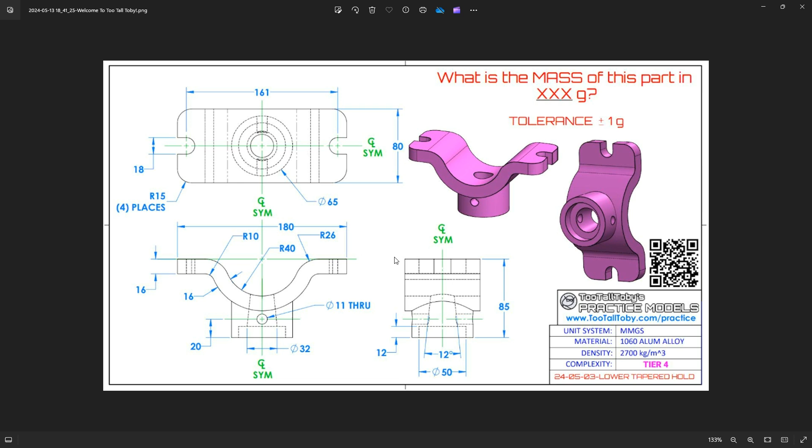Typically, I think most people would draw this bottom profile as a sketch and then offset it to extrude. I'm going to show you how to build this in IronCAD instead. We could build it the same way, but I'll show you some other ways using our catalog. So let's hop over to IronCAD.

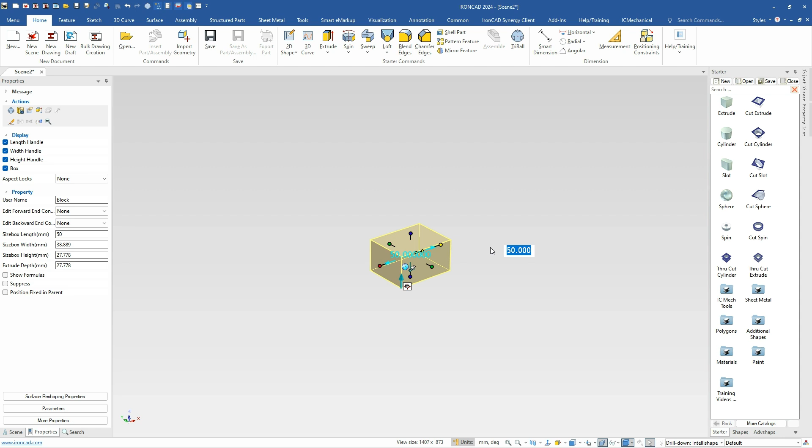I'll walk through building this model. I'm going to start with an extrude and put the overall dimensions on this. So we have our handle highlighted yellow showing which way it's going. We know the total length is 180, the width is 80, and our thickness is 16. So we'll set our base there.

Next, we have a bunch of catalogs - starter shapes, advanced shapes - and inside is a part of a cylinder, which I can drag and drop out here. I'll flip the direction and snap it down to the bottom, since that's where our center point is.

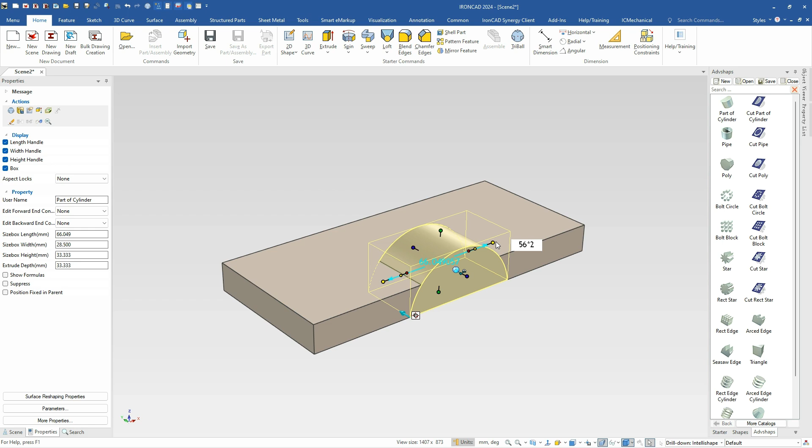Now we just need to set our diameter and radius. On the diameter side, we know this is the 40 plus 16 for the thickness, multiplied by 2, so it's 56 times 2 for the overall width. Then we do the same for the top, but this is just the radius value, so we can edit the size box to 56 for that diameter. That gives us the overall size for this shape.

So that gives us our starting shape here. Next, I'm going to add our blend, which has a 10 millimeter blend on this, or fillet, however you like to call it in other systems. We call it a blend in IronCAD, and we'll apply that there.

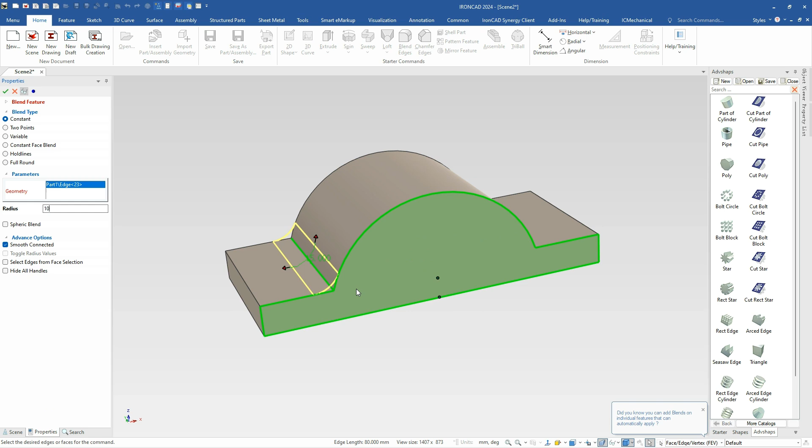Instead of doing this as an extrude by drawing arcs and extruding through, I built it this way so I can simply do a shell on this part. If I shell it at a thickness of 16, it won't mess with our shape - there's nothing to shell, it'll just shell out our center part. So we set the shell at 16, hit OK, and that gives us our value.

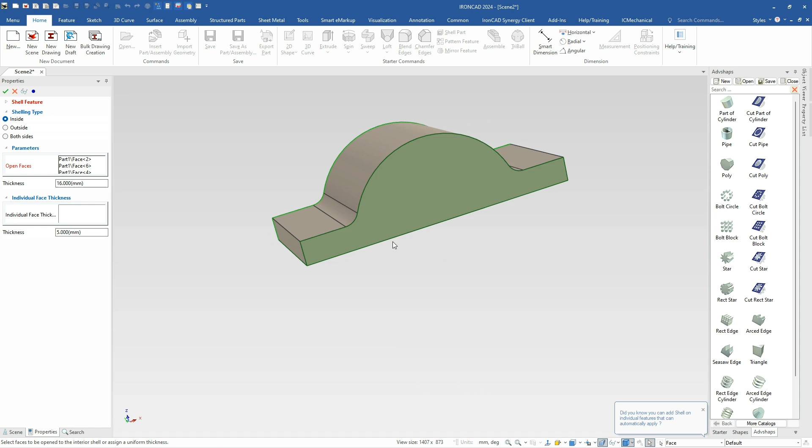If we want to verify this, we can look at this arc here. Our radius is 40, that's the thickness. So we did the math right - this is 10, and with the thickness it becomes 26, which matches what's called out on the drawing. Just a very interesting way to build that shape.

So again, we didn't have to go into the sketches to do that. Next, I'll go back into my starter catalog and drag and drop a cylinder out here.

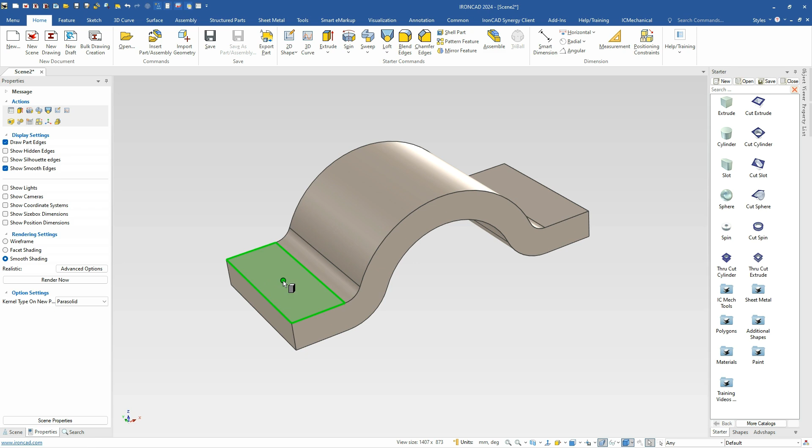I'll drop it on the center point so I have a reference that I'm in the middle of this part, and we know the distance from the bottom to give the overall height, which is 85, and it has a diameter for this shape of 65.

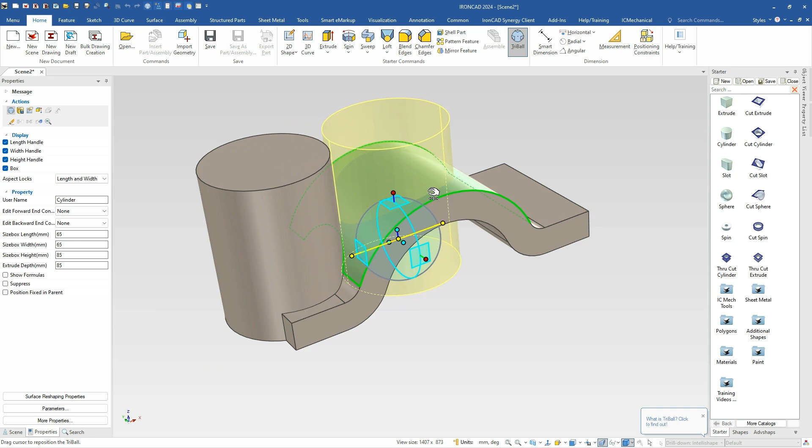Now we simply move this over to the center of our part. I'll lock an axis here, grab the center point, and snap it over. I can hit this quadrant point, or hold the shift key down and select that circular edge, and it will snap us right into the center. That gives us our location for our shape.

We don't have to use any datum planes or anything to do that - we just use our TriBall.

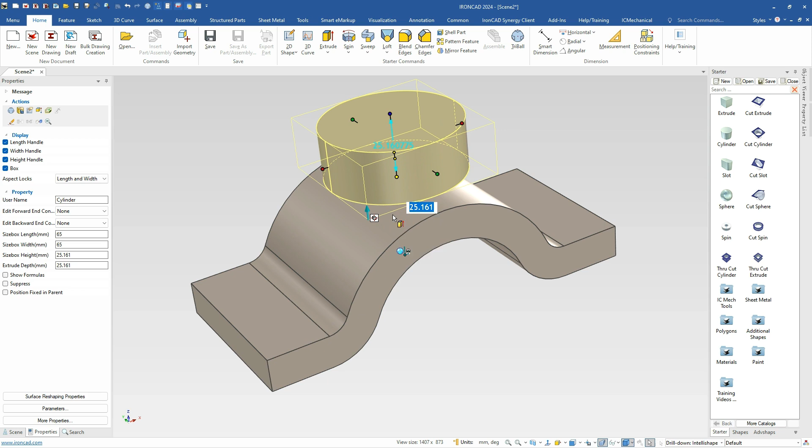Last, we want to make sure this stops on our top surface. This is an extrude shape with a direction arrow showing it extruding up. So we want the back to stop on this face. We'll right click, set the backward condition into this face, and hit finish, and that extrudes us down to that face.

Next, we'll do the holes on this part. We know there's a hole here with a diameter of 50 and a depth of 12. I'll hit the enter key until I get to the bottom handle that moves up, and set that to 12.

Next we have another hole that goes through this part with a diameter of 32, but it has a taper as well. So we'll right click, go to surface reshaping, and do a taper on the side at -6 to give an overall value of 12. Fairly simple to do.

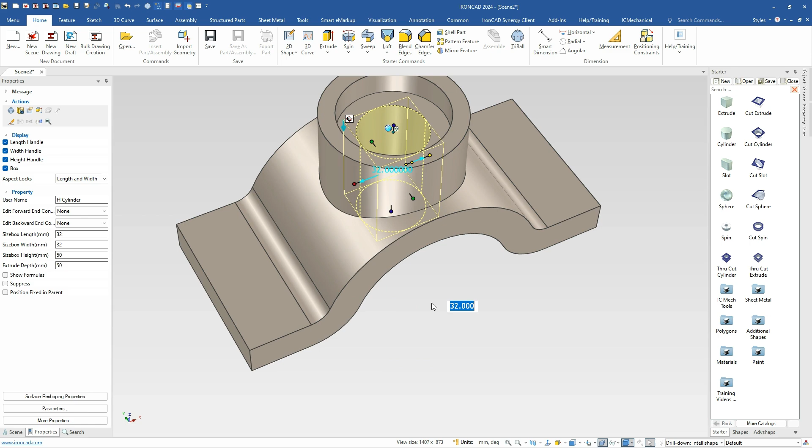Last, we're going to drop a hole here. We can do a through hole or just another hole out here, and I'm going to drop it right onto the center point. Again, I can hold the shift key down, select this edge, and it'll drop into the center. We know it has a diameter of 11 for that shape.

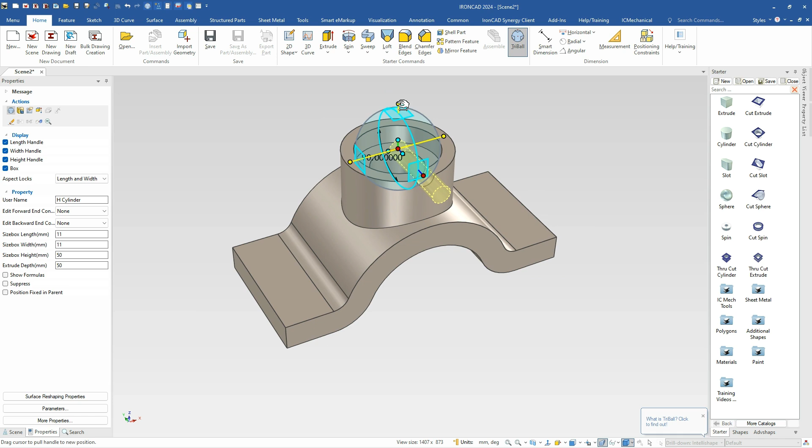We're just going to use a TriBall and rotate this away from us or towards us, either way doesn't matter, 90 degrees. Now we're in the center in the right location. We know it has a depth of 20, so we'll move it down, type in 20, and now grab the handle on the opposite side next to our TriBall and pull it through. So now we've got a through hole going through our model, at the 11mm diameter, at the location that it needs to be.

All right, we are almost done. We just have to do these other two shapes here, and there are multiple ways to do this. I can do this with one shape and draw it out as an extrude, or we can do it with two shapes. Let's just do it with two shapes—it's easy enough to do.

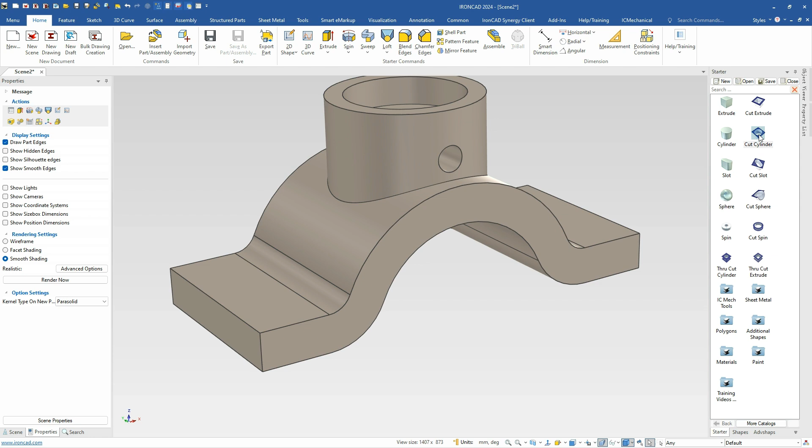I'm going to drop it right here on the center point of our face, and it has a diameter of 18 for that shape. What I'm going to do is position it again to the center, using the center point as the reference, so I'll lock it and snap it to the center.

What I'm going to do is right click and drag the shape to make a linked copy. I want to copy on both sides, so I can basically do a repeat in the opposite direction. We have a distance set of 161, so we'll divide that by 2, which gives us the 80.5 position to place it.

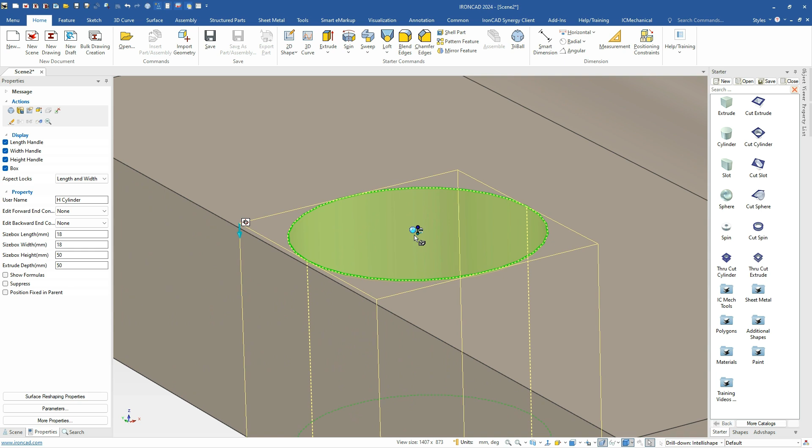Since we made these links, we can drop another shape here on extrude cut to size this. If I zoom in, I'll show you what I mean—I can drop here onto our center point with our shape, and it'll make it a little smaller for us. I'm going to set this handle to snap to the center point, then right click and drag this, set it to 18, and pull it through on both ends to cut it out.

That's basically just using two shapes instead of one. I could have added the cross section of the circle and drawn two lines on there instead—either way would have worked.

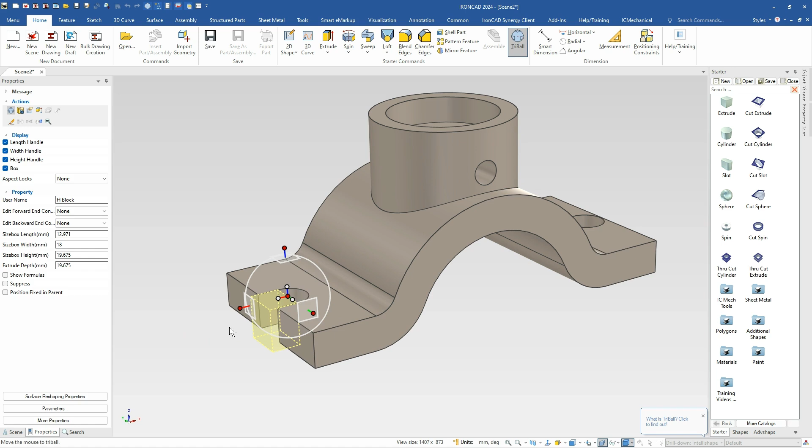Next, I'm going to make the same copy again to the other side, so I'll move it over to the center point again, turn our TriBall on, and do a mirror link to the other side. Now we have that same cutout on the other side.

The last thing we need to do is add these fillets or blends to our outer edge, so we'll select down to our edge. Everything in IronCAD is kind of context sensitive, so when you select and right click, you get the commands available for that. We're going to do a blend edge, and in this case these are 15mm blends, so we just pick the edges that we need.

We can't get this back edge, so we can rotate around, or just put our cursor where it needs to be, hovering over that edge, hold Control Alt left click, and it'll give us a filter. In this case we want that particular edge. Now we've got it, we can hit OK.

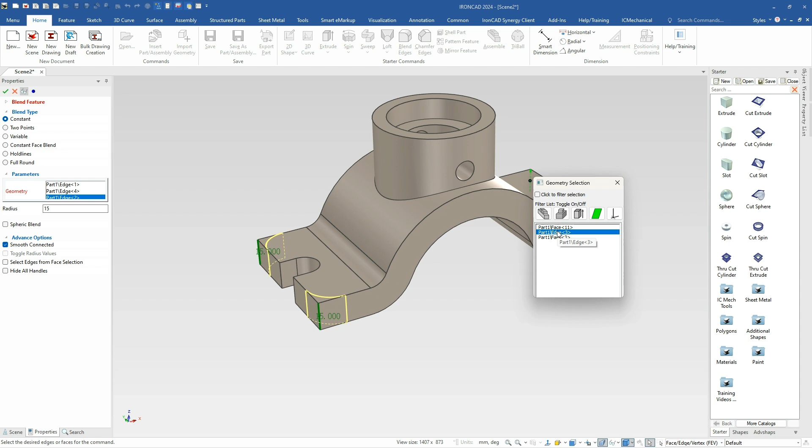So that gives us our shape for this model—this is that lower tapered holder. If we go into our mass density, this has a mass density of 2700, which should give us a total mass of 852 for this model.

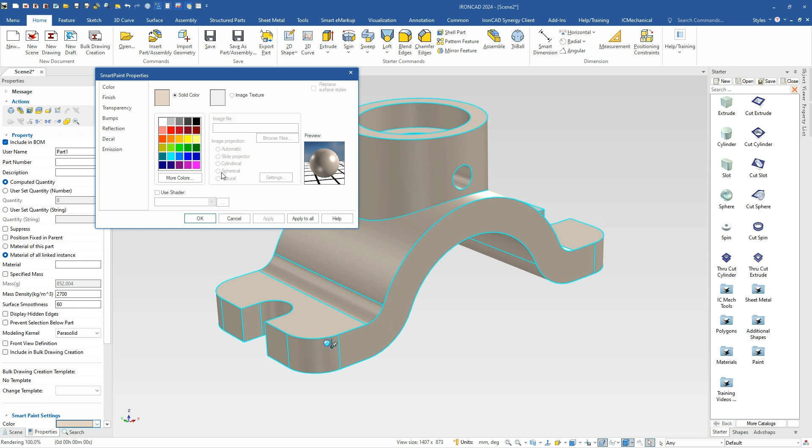So again, this is a fairly simple model to build in IronCAD, using standard drag and drop features, and a unique way of using a shell instead of an extrude. We could have done an extrude feature on this, drawn it all in sketches instead, but we're just trying to show you the different ways to accomplish these in IronCAD. Hopefully you enjoyed, and we'll see you in the next one.